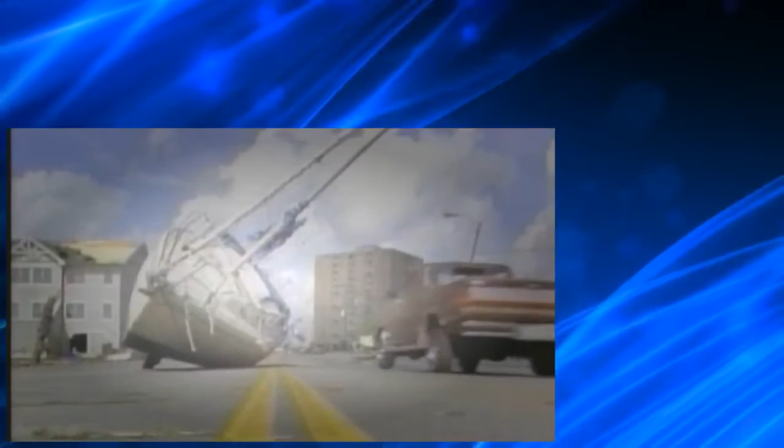These men are building the longest bridge of its type ever attempted in North America, but they're doing it in the worst possible place. In Charleston, South Carolina, where hurricanes, earthquakes, and the world's biggest container ships pose a deadly triple threat to the bridge and to the workmen building it.

If they succeed, Charleston will manage to remain one of the nation's most vital ports. I plan for this bridge to last forever. But if they fail, this flower of the South may fade into history once and for all.

6:30 a.m. in Charleston, South Carolina. A steamy Monday in June. Near the mouth of the Cooper River, a crew boat eases from its dock and heads out into Charleston Harbor. Morning. On board, 20 bridge builders, headed to work on the construction site of the new Ravenel Bridge, a long overdue replacement for a pair of decrepit steel spans.

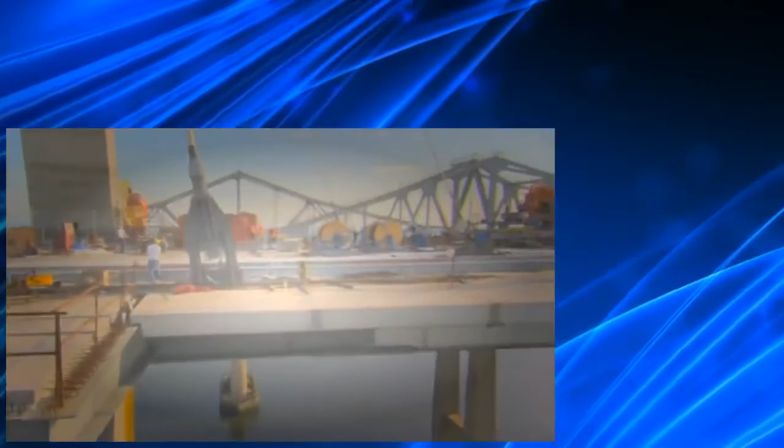Cable stay structures are the hottest thing in modern bridge construction, and engineers around the world are trying to outdo each other with even more daring designs. On a cable stay bridge, the deck hangs from steel tethers anchored high up on the main towers. They're known for their sleek lines and simple beauty, but they're notoriously tough to build. The longer the span, the longer the cables, and the bigger the challenge to builders. When completed, the Ravenel Bridge will be the longest cable stay bridge in the U.S.

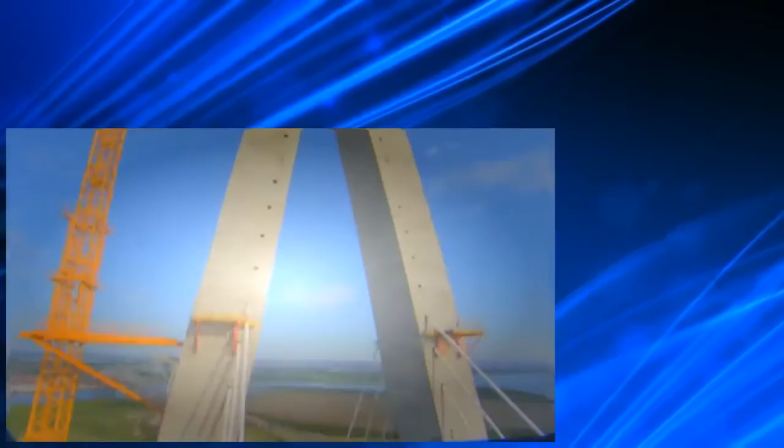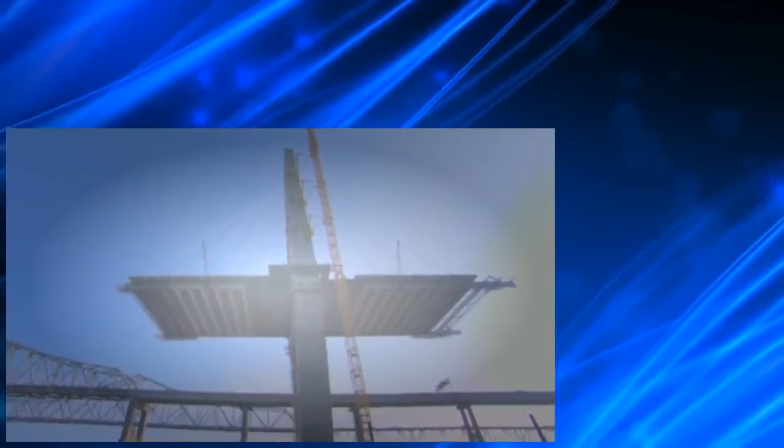Since 2002, this crew has erected two 550-foot concrete towers, built two interchanges, and nearly completed both elevated approaches. Now, they're hanging the bridge's 64 road deck sections. Thousands of tons of steel and concrete dangling 200 feet over the Cooper River. To stay on schedule, these guys need to assemble a new deck section every 5 days. That means hanging girders and floor beams, picking and placing concrete slabs, pouring connective concrete, and stringing and tensioning cables.

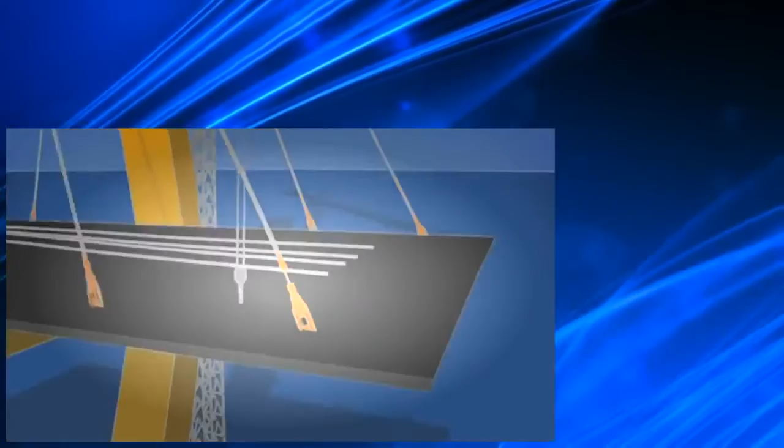And while this boatload of guys does what it needs to do here on the West Tower, another bunch of guys is doing the same work over there on the East Tower. The objective? To meet in the middle and call it a bridge. For most of these men, this is the biggest job they'll ever take on. It's also the most hazardous.

These workers spend 12 hours or more per day stranded on this narrow island in the sky. They depend on each other for their lives, now more than ever. Just a few weeks before, a steel worker plunged to his death after failing to attach his safety harness. So these days, Superintendent Everett Gibbs drills into the heads of his men the danger lurking everywhere.

Today, we're going to hit a couple quick topics on our basic safety rules that we seem to be having a problem with. The first is safety glasses. You lose an eye. When you lose it, you lose it. Everybody on the same page? Since the fatality, failure to tie off carries serious consequences. If you are not tied off, you are fired. Period. You have kids, wives. Don't let this be your last job. How's that for motivational speaking?

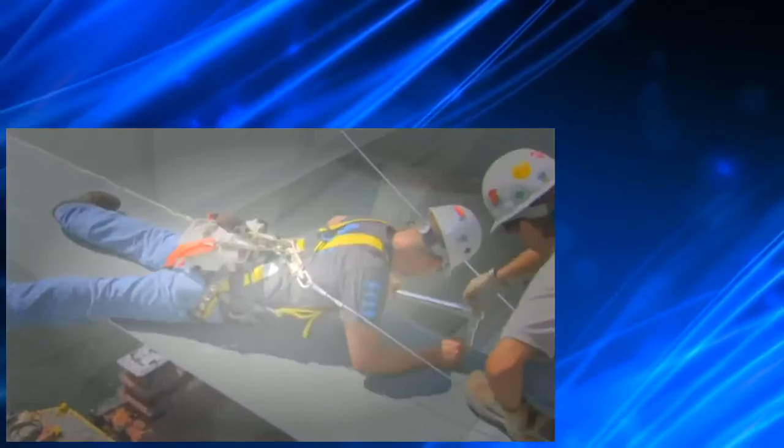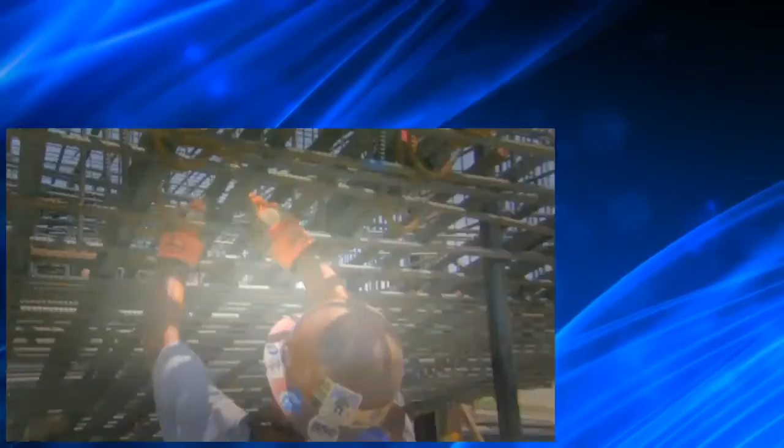Day 1. The crew is getting ready to hang another segment. 50 feet of brand new real estate. Now's when we get creative, because we're going to run into this every time from here out. They've done it several times already, but they've never had to do it under so much pressure. The first deck sections were part of a learning process and took weeks to complete. But those days are over. Let's go! Come on! They have 44 segments to go, and now they've got to shift into high gear.

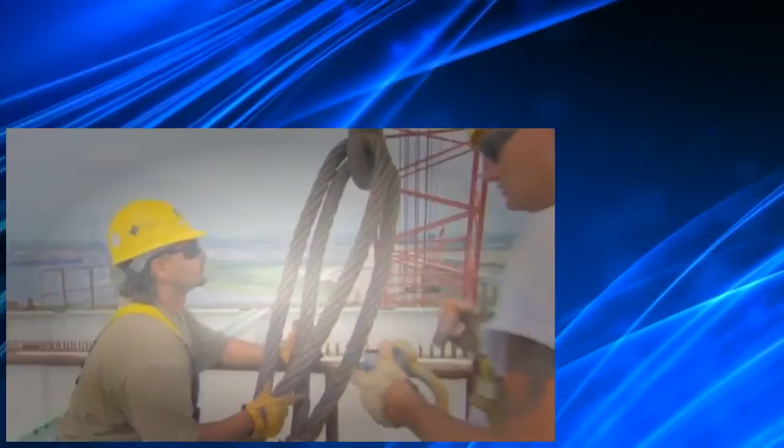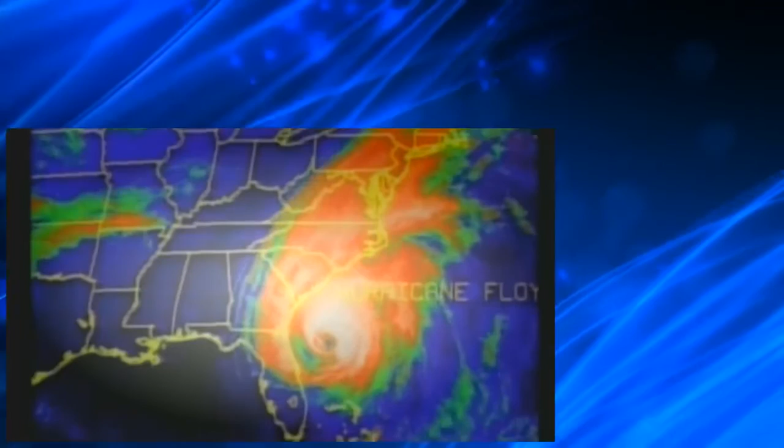Because Charleston sits smack in the middle of Hurricane Alley, and the crew finds themselves smack in the middle of hurricane season. Most everyone on this job site remembers the destruction Hurricane Hugo brought to Charleston back in 1989. 10 years later, it was Floyd that did the drubbing. And now, just as deck construction is underway, forecasters say the East Coast is overdue for a major hurricane.

To bridge workers like Dave Vanna, every foot of deck they hang and every day that passes without a storm feels less like luck and more like the run-up to a terrible reckoning. If you look over at that tower, before these are connected, there's this big massive roadway just hanging there in the air. Until we're connected and everything's locked together on the shores, it's a very big, vulnerable piece of weight sticking up there. And it's getting bigger by the day.

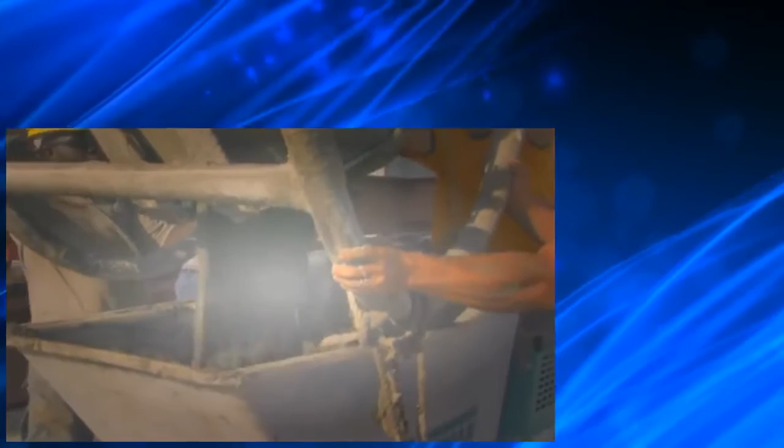Now, as the next construction cycle gets underway, the men are taking care of some unfinished business. A concrete pour has been scheduled to put the finishing touches on the road segment they completed the week before. Incoming! All right, let's see some action here. This weighs 17,000 pounds. The name of the game? Get 85 tons of concrete into the gap between the deck panels.

That's a Georgia buggy, they call it. Why? I'm not sure. I'm from Maine, and Georgia's down south. You're gonna have to ask one of these southern birds that.

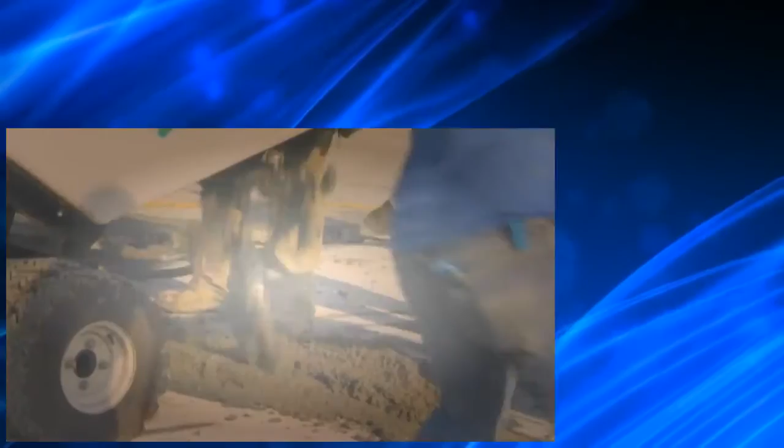They've got to get the mud in the hole, as the guys say. It's a touchy mix. You've got 3 hours supposedly from the time it's dispatched to the time it's delivered. It means it's got to leave the plant, go to the dock, offload it on the barge to here to us. And it's got to settle to the bottom, which takes a lot of coaxing.

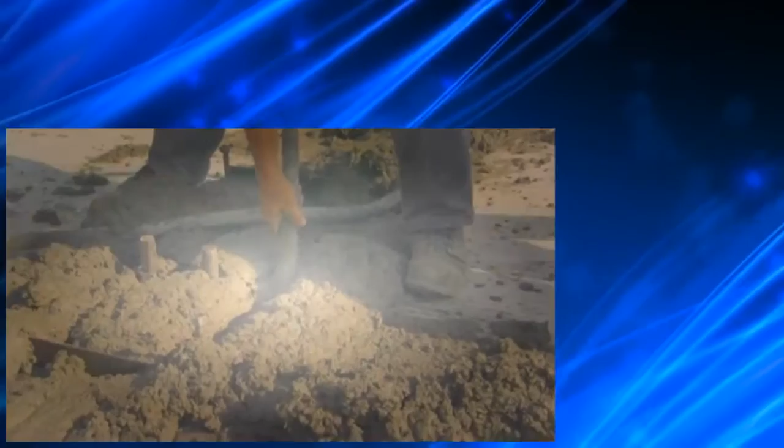Well, that concrete's still good. You get it in there and get the vibrator to put it in, and if it'll level out, it's all right. The vibrator makes sure the mud settles, until finally they can flatten it out, smooth as a baby's butt.

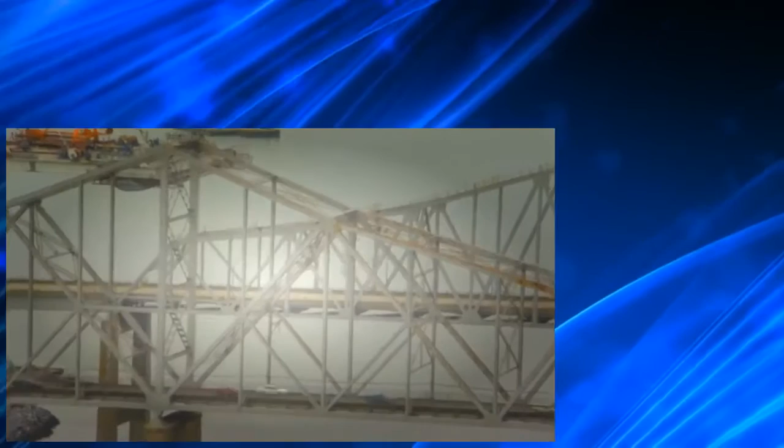Once upon a time, these antique spans were sufficient to carry Charleston's 65,000 cars each day, but not anymore. We knew that the old bridges had to be replaced because they were getting very, very old. Structurally, the old bridges were a 4 out of a possible 100. Simply put, the old bridges are accidents waiting to happen. Not only that, but today's biggest container ships simply can't fit beneath them.

Chris Thornton has been piloting ships like this under the old bridges for 15 years. At low tide, these babies just barely squeak by. The bridge when I first started wasn't an issue, but now it seems to me that every ship has an issue with it. We have to monitor the current and the stage of the tide to get under the bridge. If Charleston can't accommodate bigger ships, it could become a second-rate port.

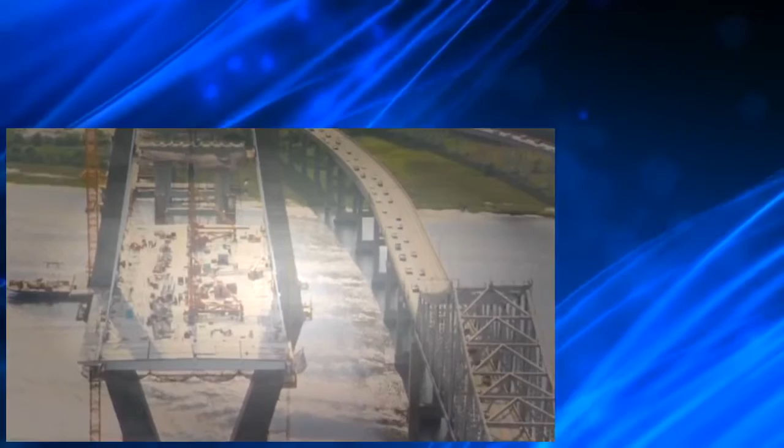But squeezing the $600 million for a new bridge out of state and federal coffers would take a special kind of person. Someone with vision and, more importantly, clout. It took State Senator Arthur Ravenel, a man with a lifetime of political favors just waiting to be cashed in. You go to people and you ask them for big bucks, they're a little bit reluctant to open their wallets. But everybody came around, and the bridge is being built. The state decided to name the bridge after him, while he's still around to enjoy the honor.

Today's work on last week's deck section isn't done until the quality control or QC guys say it is. James, Dave, and Mickey are the first line of defense in making sure the bridge will last its promised 100 years or even longer. 10-4, me and Todd are on the west right now. The existing bridges aren't anywhere near that old, but both are already obsolete. If this bridge is going to last forever, there can be no shortcuts.

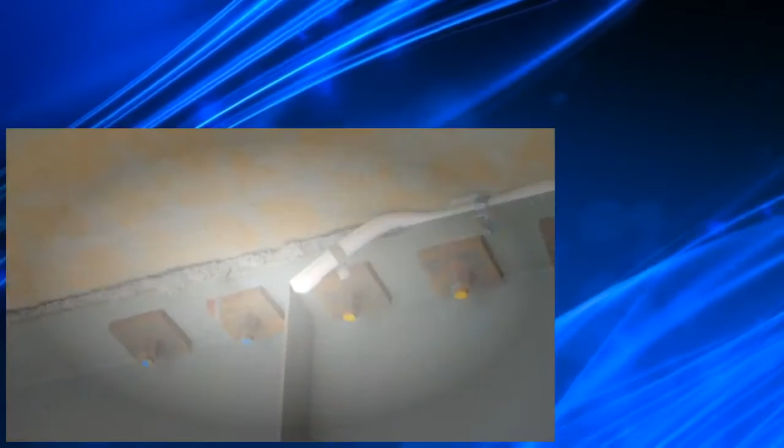We got painters coming here around August, September, I believe, and it's got to be clean. You have to have a clean surface for the paint to stick to. They're snooping around under the deck, and they found a problem. Anywhere there is drippage of concrete under here, we can't have it. Concrete has been seeping through the cracks, and now it's starting to harden. This might be the worst.

Mickey and I took a look underneath segment 205 after they poured that infill pour, and there are several areas where they had leakage. It's just a problem of access down there right now. There isn't a good place to tie off and get workers down there as the concrete pour is going on, to get the concrete off when it's still wet, which would be the easy thing to do, of course. Pressure washing. Right. But access right now is a problem, so... Right. Well, they're going to have to make access to get it done. Yeah. That's just all it is to it.

So if we get that done, and from here on out, if they pressure wash right when it's poured or within 6 to 8 hours after it's poured, it can be removed. But if they chip it off, it could affect the paint, it could affect the girder, and so on. I'm going to bring this back to the office, discuss it with Marvin, and then see how he wants to handle it. Okay. I know there's priorities, but this is a priority also.

Nice catch, guys. They've got the safety of the longest bridge of its type in the Americas riding on their shoulders. With pressure like that, they need to kick it out now and then.

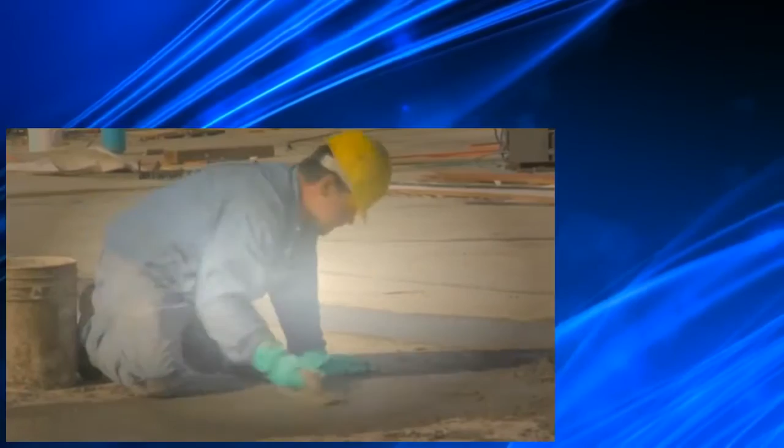Day 2. The crew has burned an entire day of a 5-day schedule finishing last week's deck section. To meet their deadline now, they'll have to do in 4 days what is usually a stretch to get done in 5. They're ready to attack the steel for this week's deck section.

Massive floor beams that are just arriving by truck, about a mile upriver at a former Navy yard, now a staging area. Each of these floor beams is 126 feet long and weighs 25 tons. It'll take 2 precisely coordinated cranes to get each one of these puppies onto the waiting barge.

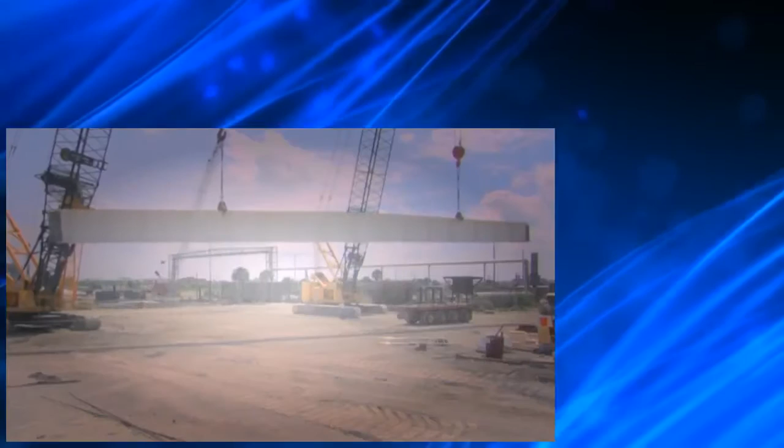Each truck deftly positions its load, and then the ballet begins. A dance between man, machine, and monster chunks of steel. It takes half a day to get all 300 tons loaded up.

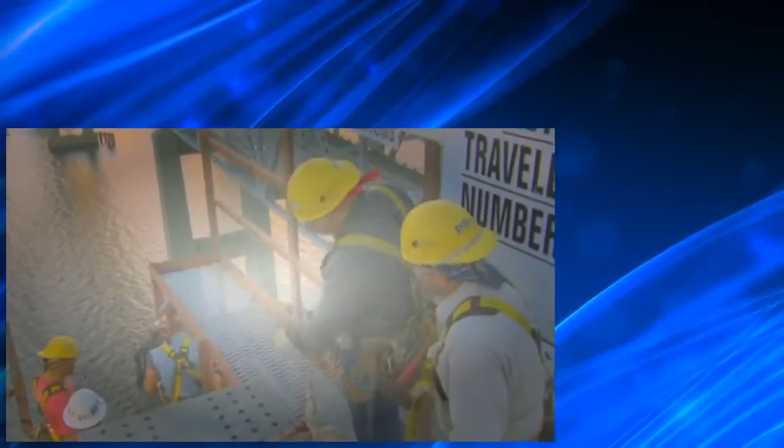Now all they need is a tug to get them down the river to a crew of anxious and bored ironworkers. They wait and wait and wait a little more. But by the time the steel arrives at the bridge, it's already nearly 8 p.m. The question is, should they call it a day or press ahead? Their schedule is slipping, and the bridge needs this iron.

Good thing these ironworkers are a special breed. This is not a crew that puts off till tomorrow what they can get done now by working all night long. Cabling on up. There's nothing newfangled or high-tech about their job. Give me a little bit of left-hand swing. Just 10 men, a crane, and a radio.

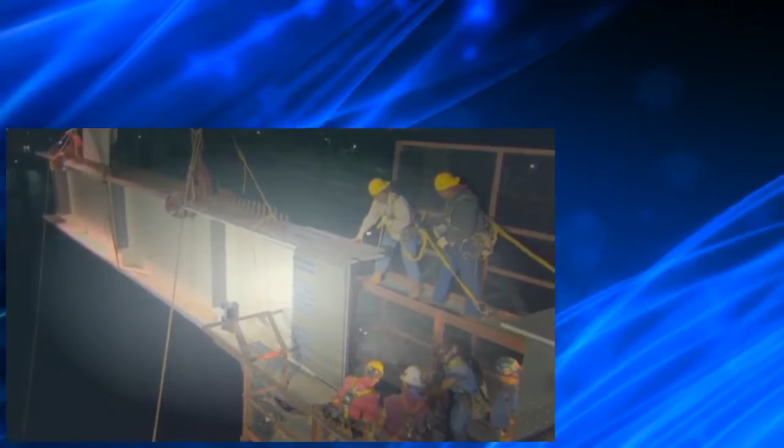Boom down. Maybe a little bit of cable up. To get a couple of 40-ton pieces of steel to fit like a glove. Hold that. Bring it right. Once the girders are in place, workers slam steel pins through bolt holes.

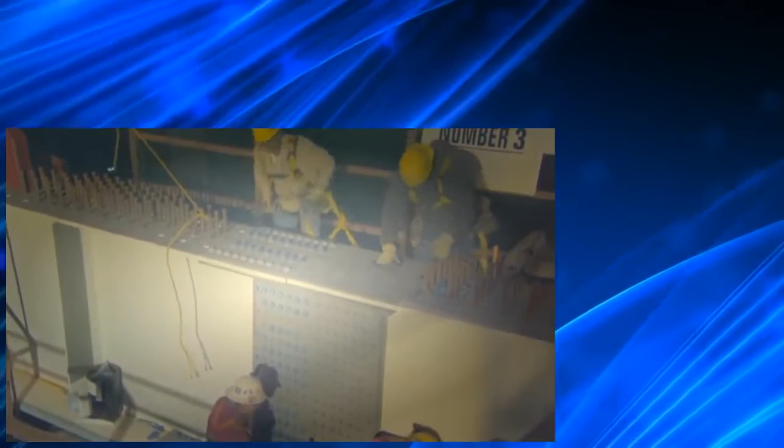Only then do they get the pleasure of cranking home all 494 bolts. Every bolt and nut that goes into the bridge is hand-picked and matched by type, size, and load-bearing capability. And Lance here is the brains behind all the bridge's nuts. In the main span of the bridge, there are 172,000 bolts. 61.2 tons of nothing but nuts, bolts, and washers.

How many of those things you put together in a day? If I'm going to be on television, 1,200. If you or my boss is not here, 800. You getting carpal tunnel syndrome? You using those fancy words, you got one for bored? How do you cope with the boredom? I'm not really here. Just last week I was deep sea fishing and Paris Hilton was the first mate on the boat. Good one, Lance.

Does it matter how the nuts go on? Yeah, nut goes on the threaded end. Washer goes between the nut and the head.

You feel a little neglected out here? Sure, I'm not very sociable. In fact, talking to you is about the most mouth running I've done in a long time, and I'm getting kind of tired of that.

Day 3. Daylight reveals that the night shift pulled it off. The steel is up and ready to receive the panels. Thanks to the ironworkers' determination, the crew seems to have reclaimed a good chunk of their schedule. But there's still one more job to do before they can lay the concrete deck panels. The cables need to be strung and tensioned.

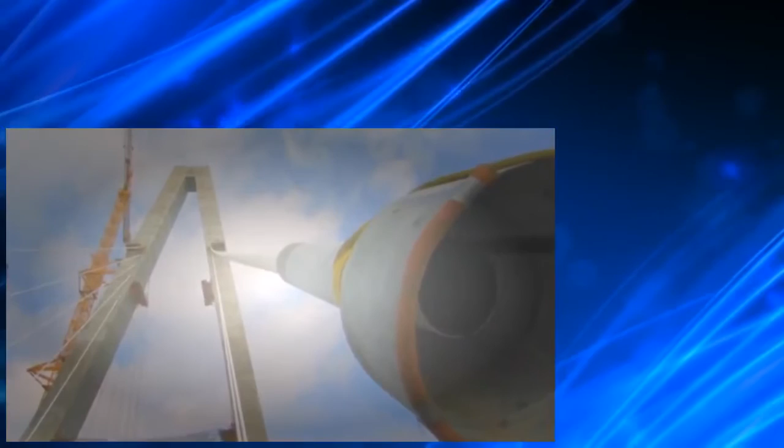And it can't get done until this guy, Bridge Inspector Russ Touchberry, is there to oversee it. Russ is one of the lucky guys charged with making sure mess-ups don't get overlooked. And if there's one bridge element everyone wants to be sure is perfect, it's the cables. A lot of people actually wonder if the cables are simply there for looks. No, that's definitely not the case. The cables hold up the road deck, period. And they're a lot more complicated than they look.

To string the cable, a crane attaches the long white tube that gives the cable the appearance of being a single strand. But it's just a protective sheathing through which the actual cable strands are fed. Up to 100 plastic-wrapped strands can be in one white tube. And each strand consists of 7 individual wires sealed with a coating of wax.

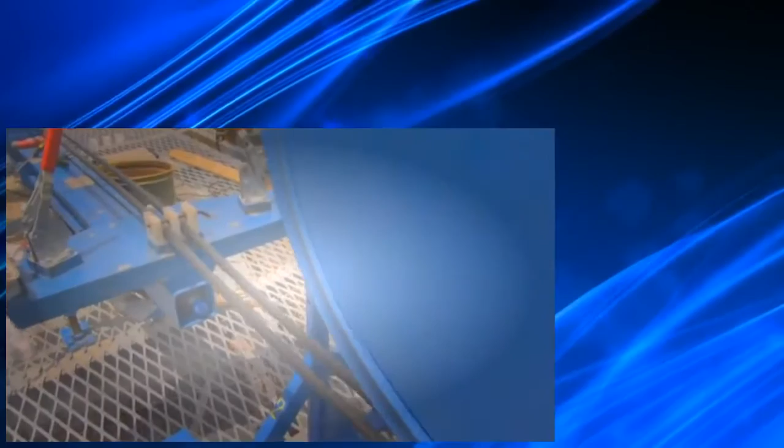When it's finished, the bridge will have more than 5,000 miles of individual wires in its 128 cables. End to end, that much wire would reach to the West Coast and back. The strands are pulled up through the sheathing 2 at a time using a motorized shuttle. Russ's job is to make sure they end up where they belong, problem-free.

If we have a case where there's actual strand exposed, then that needs to be fixed by that repair procedure. So that's what we're looking for. Once strands are inspected, they have to be tightened 200 feet up inside the towers. Luckily, there's an elevator and Dave Vanna to operate it.

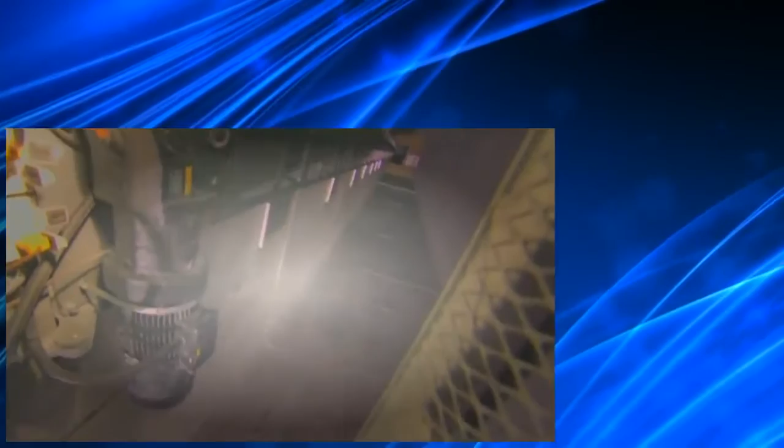What happened? Well, we're in the middle of a small minor crisis here. Yeah, the power, it shut off on itself. I'm coasting down on the brakes, Brian. Yeah, as we're going to the top, as you know, we're holding the camera. Our umbilical cord that runs this elevator up actually got snagged down below on something, tangled up, and it actually pulled out of the power supply.

Right now we've got approximately 200 feet to go before we can get off, and we're working on fixing it. That smell is the actual brakes. That's the brake pad, and you can smell them getting warm, so. But then when they overheat, we get a quick ride at the bottom. Yeah, if that's true.

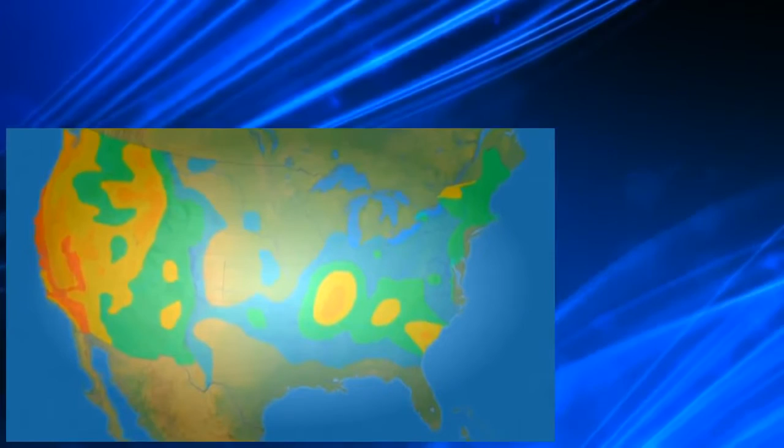But having the TV camera guy in there with me coasting down, I guess they're going to get a show of what we have to go through. Hopefully, they won't suffer anything worse than a broken elevator. But in Charleston, anything is possible. What most people don't know is that the city sits directly on top of the most seismically active fault line in the eastern U.S. The last major quake, measuring 7.0 on the Richter scale, devastated downtown Charleston and killed 60 people. That was in 1886.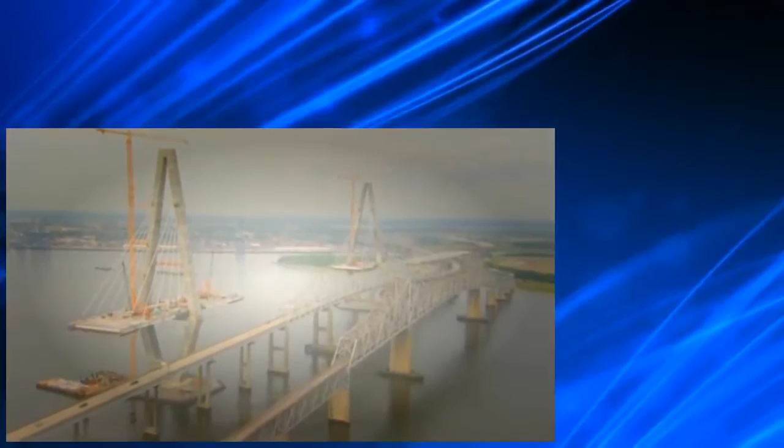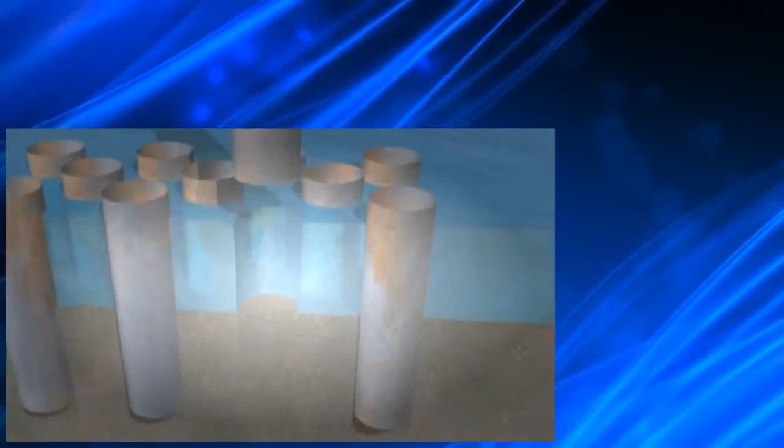Today, seismologists predict that another killer quake will almost certainly rock the bridge sometime in the coming century. Bridge designers say, bring it on. They've engineered this baby not only to withstand the next big one, but to last 100 years, at least. They began by making the towers rock solid. Because of the tremendous load the bridge would bear during an earthquake, the footings had to be deep, real deep. For each tower, 11 steel cylinders, each 10 feet in diameter, were sunk nearly 100 feet into the dense clay at the bottom of the river.

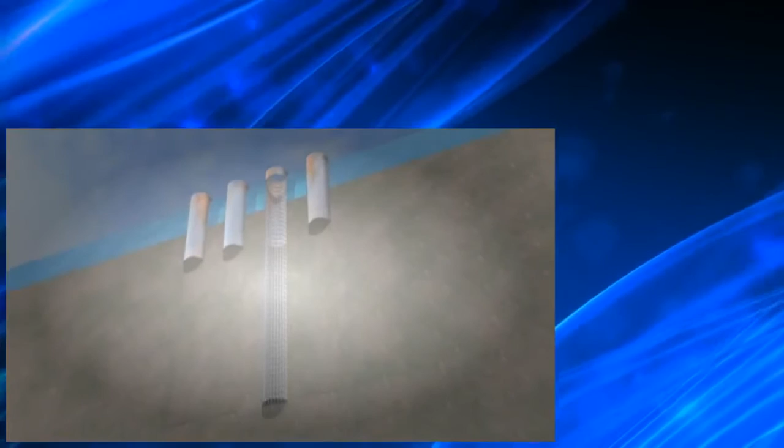The shafts were dug even deeper, to a depth of 230 feet, with mammoth rebar cages inside the steel casings, encased in nearly 1,500 tons of concrete. The result? Footing strong enough to support the towers in a major earthquake, but not strong enough to withstand a direct hit from a container ship. That's no Chicken Little scenario. It's happened before. In 1946, a runaway ship took out a main span, spilling a family of 4 in their car into the Cooper River. In the last 25 years, ships have twice run aground to avoid colliding with the bridge.

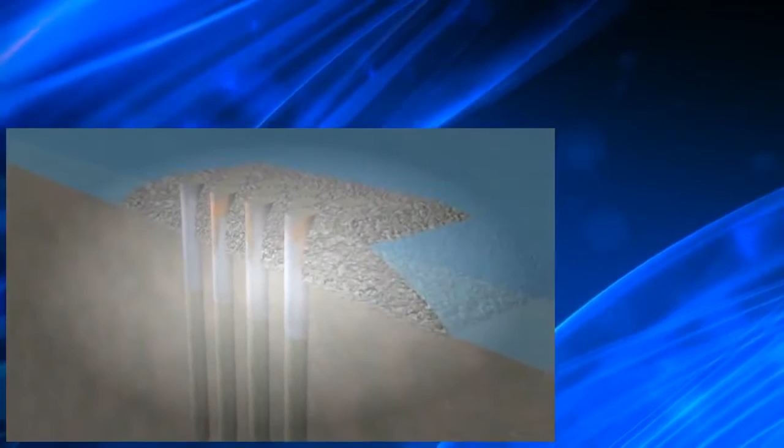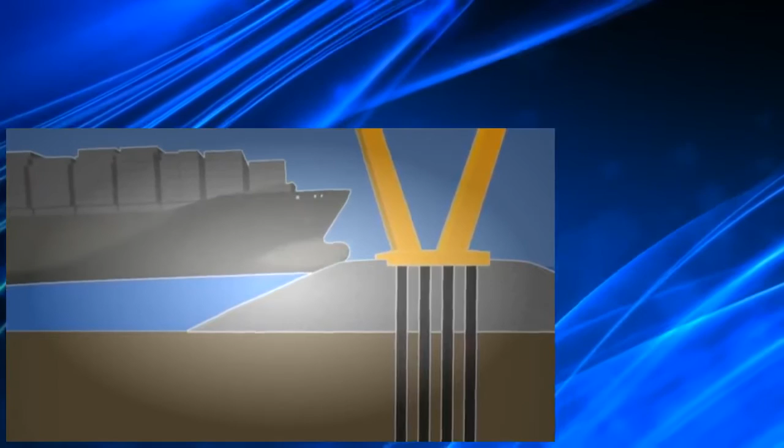So this time, designers decided to do something about it. They surrounded the towers with protective rock islands crafted from 17 shiploads of Canadian granite. 700,000 tons of the stuff. Enough rock to create 5 acres of stone on the riverbed and an acre at the surface. It's hard to appreciate the rock islands because you really don't see them. All you see is just the top. It's almost like the island of Hawaii. You just see the tops of the old volcanoes. With a base 5 times larger than the top, the islands slope up from the bottom of the harbor to stand as impenetrable shields between a runaway ship and the bridge. It looks like the future Ravenel Bridge will be wholly protected against man and nature.

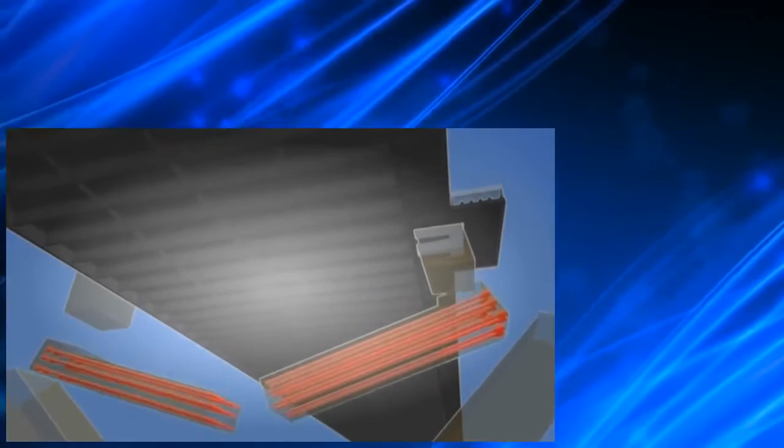But there was one more engineering challenge. Because the bridge is diamond-shaped, it needed a little help around the midsection. Hidden inside the crossbeams are steel cables that run from one side of the tower to the other and actually hold the whole shebang together. If, for some unbelievable reason, they all broke at once, the actual bridge would collapse. It would be catastrophic. That's where Dave comes in. He's making sure that these vital tendons are protected from the #1 enemy of steel, rust.

Dave's the superintendent on the other tower, but today he's here on his day off. How about you, Brian? One of my nicknames out here is Super Dave. I'm not sure how I got that, but that one stuck a few times. Elevator's broke down.

Sometimes Dave feels a little out of place. Not because he's on the wrong side of the bridge, but because he's on the wrong side of the Mason-Dixon line. I'm from a small country town in Maine called North Nobleboro, Maine. For the most part, I've had some good southern hospitality. I've run into a couple folks that had some prejudice against Yankees, but that's okay. I try to instill that we're all Americans.

Dave's also the bridge's leading expert on something called grout, a unique sealant that protects structural steel and cables from rust. The crew mixes up their own special batch right on site by combining cement powder with water. Then it's pumped into nooks and crannies that regular concrete can't reach. That's holding 75. Let me pinch it off, see how far it goes up.

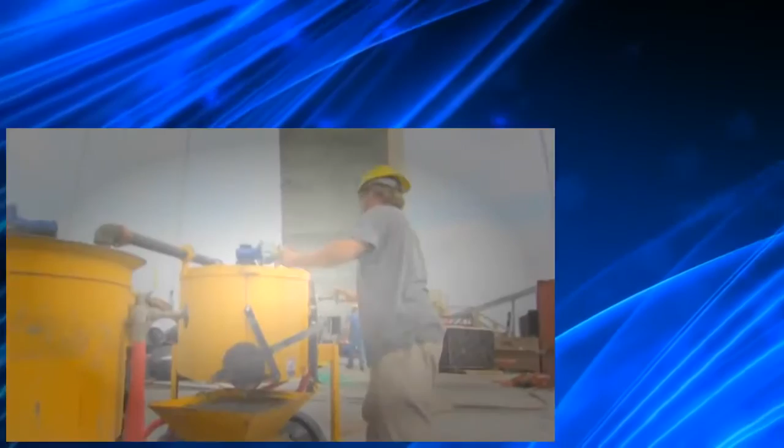In fact, when it comes to grout, Dave's a bit of a nerd. It's like a real expensive coat of paint on a Rolls Royce. It's what will keep this bridge together for 100 years. So if we don't get this perfect, then we're in trouble. Are you seeing any grout yet?

While the guys work on the grout topside, Dave heads underneath the main span at the crossbeam, where the end of the tendons are locked in place. There's 4 million pounds of force right on this one tendon. It'll keep them from corroding and ultimately keep the road deck out of the Cooper River. We're going to see some action here in a minute.

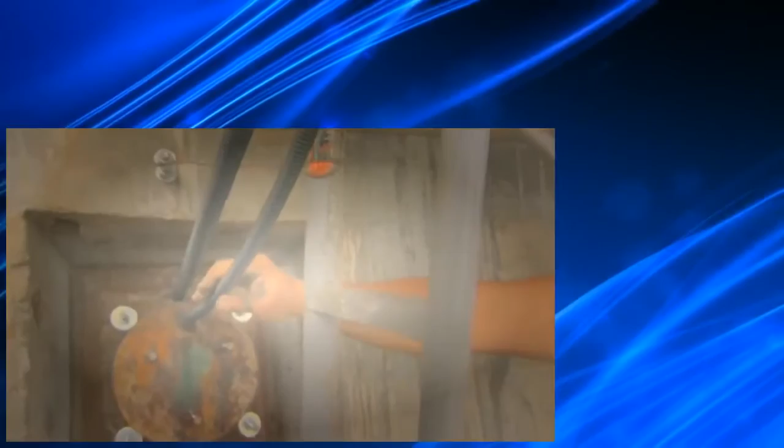All right. Hold it right down a little bit, Russ. All right, Grip, you bleed your cap out one more time. I've got grout here. Okay, do you count down for the shut-off? Okay, pump shut off in 3. 1, 2, 3. Pump is off.

If we had any type of air bubbles in these lines, I just need to make sure this stays above that, and that'll just assure me that whatever grout's left in these tubes will keep that cap full.

Am I getting heavy, Russ? Nah, man. All right. It's a beautiful thing. A crew boss and a whip-cracking bridge inspector pitching in together. Freezing cold right now. Russ Touchberry better enjoy this moment while he can.

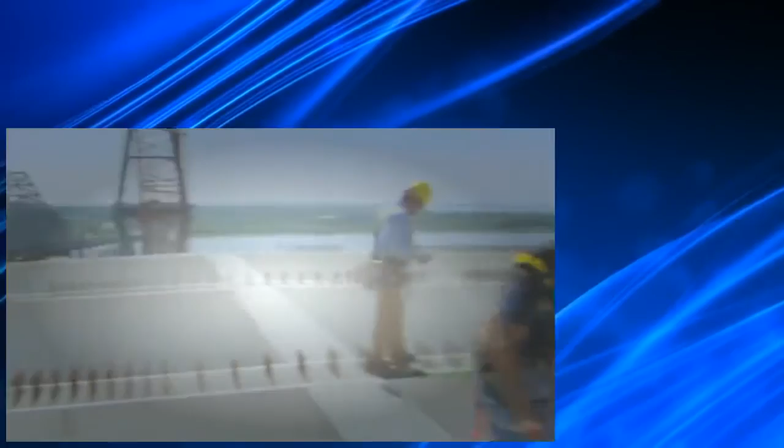Day 4. The steel framework is up, the elevator's fixed, and the cables are tensioned, ready to hold up the 200 tons of new concrete destined for this week's road deck section. Incredibly, the men have fought their way back on track. I need a 10 right there. I don't need to pile up on that. But the delays of the previous 3 days have deck foreman Alan Griffin moving at warp speed.

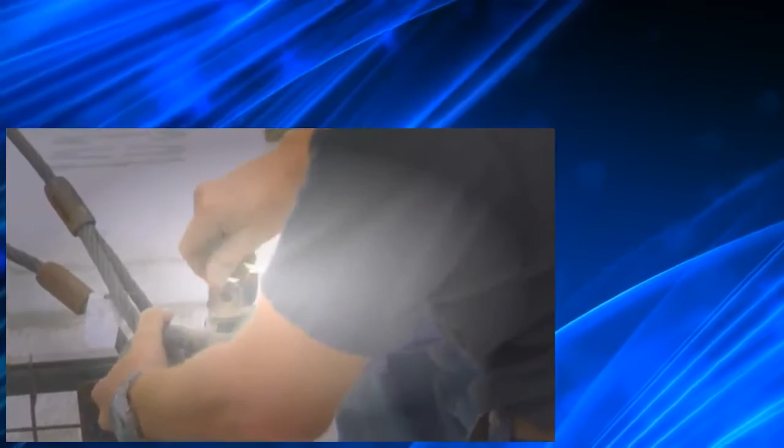This guy is busy. I got 16 things going on at the same time here. Just put the shackle through right here, and we'll put the chains up on the hooks. Creative engineering. He doesn't much care for the limelight. I'm running around with a microphone on me. So good. Don't even ask. But he can't hide from us.

Easy on the phone. Alan keeps tabs on just about every job on the deck, no matter how small. Oh, yeah, I'll get it. We'll need to go around the hook. We'll need the big blue. Just leave those on the hook, because that's going to be ours permanently. I don't know whose they are or whose they were, but they're mine now. Let's go ahead and swing to your right. Go ahead and boom in. Boom it down.

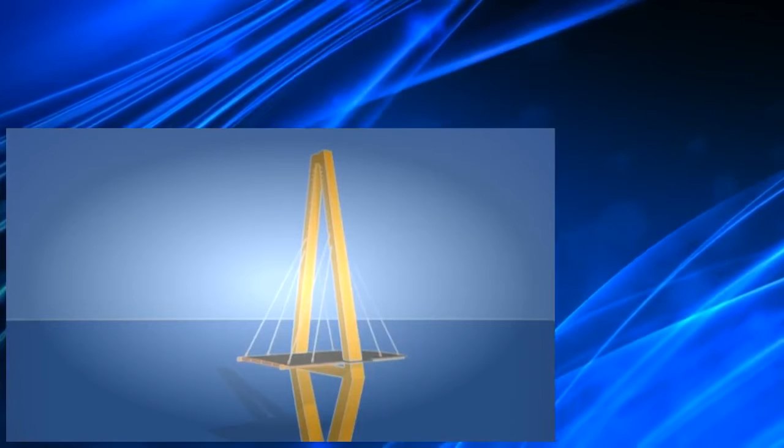Alan's a micromanager. He has to be. There can be no slowdown or deviation from the tight confines of the construction sequence. Easiest way to describe this would be a seesaw. If you're sitting and you have 2 equal weights on both sides, that seesaw is going to be balanced. Both people are going to be up on both sides. The weight load on the bridge must be carefully balanced at all times. If they build too many sections on one side, the tower could topple.

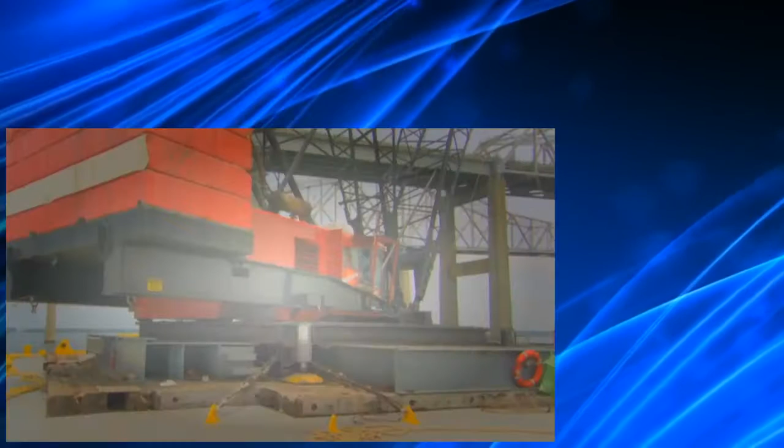Right now, Alan is running into problems. To get the steel and concrete they need onto the deck, Alan relies on the ringer crane, a 400-ton rotating behemoth mounted on a ring of steel. Because the crane rides on a barge, it can be moved around the job site to tackle just about any task. It's the bridge builder's most versatile tool.

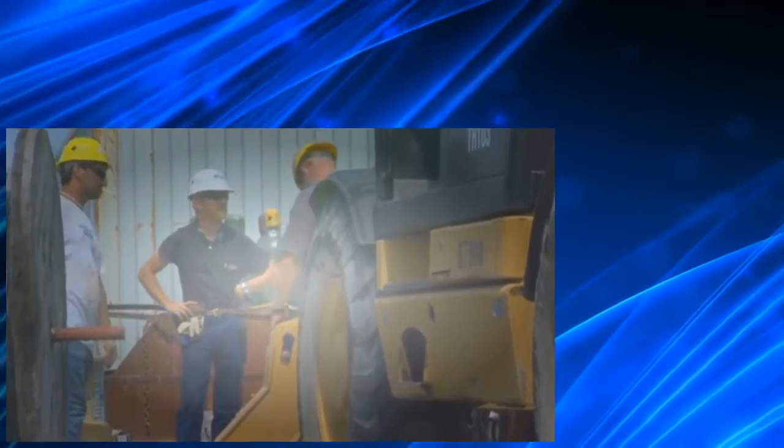But there's just one of them, and right now it's parked on the wrong side of the tower. And there's no tugboat available to move it. Ringer can't reach it. Can the forklift hook the darn thing? Either that or I got a ringer hanging in the channel doing nothing, costing $1,000 an hour. See what we can do about getting any of those slabs up there.

It takes 5 hours, but by 1 o'clock the crew finally gets their tug, and the work can begin. They've got a mere 3 hours to lay this section's 12 panels. After that, they lose the ringer crane again to the crew on the other tower. At 200 feet with only a safety cord to catch them, it is extremely dangerous work.

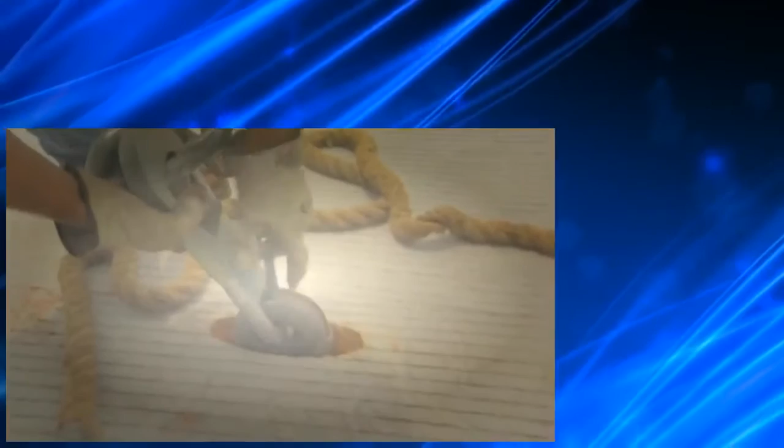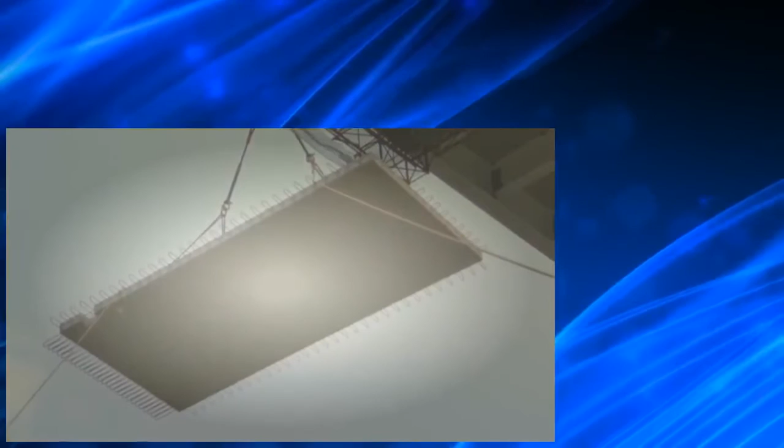Time is critical, but they can't sacrifice quality. To get the job done, the crew must rely on the crane and its operator. And that pushes them both to the absolute limit of their abilities.

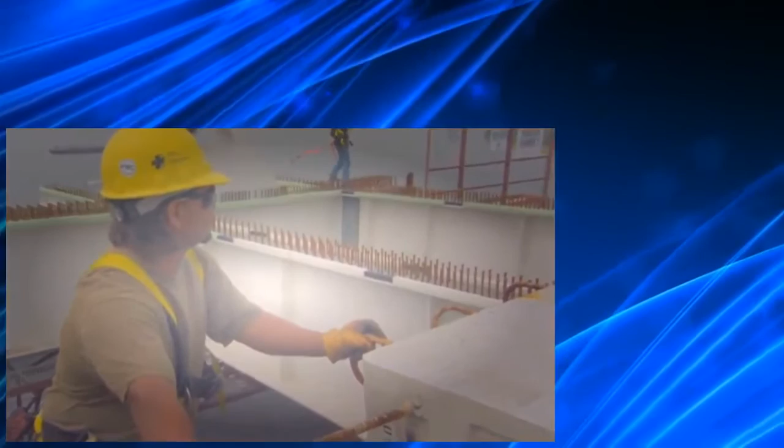What we're looking for as we're setting this, we want to cover at least 2 inches of concrete over the lip of the steel. I need to have that on all 4 sides. Now, sometimes we have a little bit of variation in that slab. So what we try and do with that is, if there's, say, a 1/2 inch of variation, is split that difference where I have a 1/4 inch off each side, whether it be north, south, east, or west.

To get it as absolutely square as we can, where we can have as much weight as we can on the steel itself. This stick right here has 280 feet in it, and he can move that thing within 1/8 of an inch of tolerance of what we need. They have that much control down there in that friction rig.

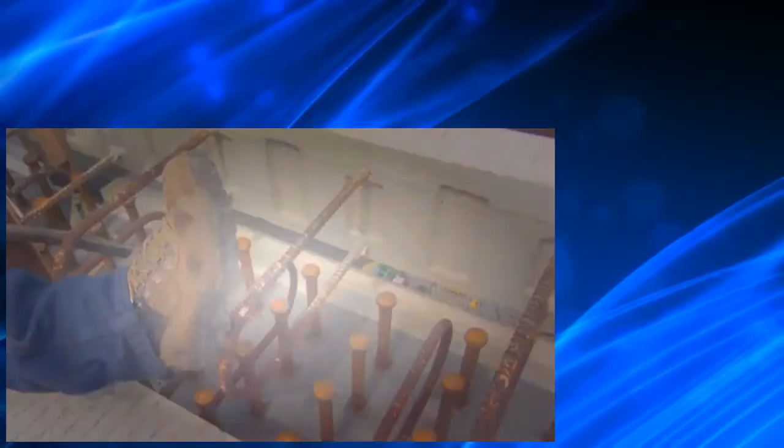Alan, the chief rigger, and the crane operator stay in constant radio contact. The trio must make thousands of minute adjustments to guarantee that the 16-ton slab sits squarely on the beams. You need to go this way, just there. They must get it to within a fraction of an inch. He's good on that corner, you're good on that corner. It's got to be about right. Take it down. Drop it down.

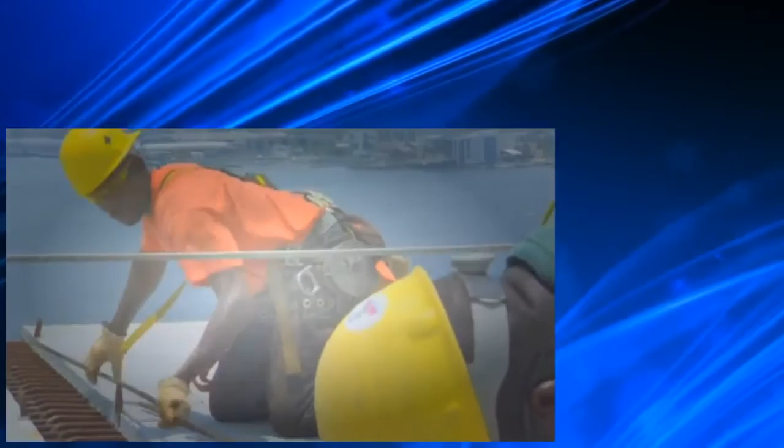With the panels laid, they waste no time knitting them together with rebar. After the concrete is in, the deck will be transformed into one giant slab. But as always, before anything can go forward, the last phase of construction must be inspected. This afternoon, panel inspection falls to Russ Touchberry. Don't let this boy's baby face fool you. He may be only 25 years old, one of the youngest on the crew, but he's got an awesome responsibility.

Couple things I noticed up on the deck. The sidewalk slab where the hurricane tie-down is supposed to go through, it's supposed to be sidewalk slab 10510. They put 20515 in its place, and it doesn't have a block-out hole for the hurricane tie-down up top. I wonder why they did that. It's his job to hold the bridge supervisor's feet to the fire, looking for construction errors and then standing his ground to make sure they get fixed, no matter what the cost in money or time.

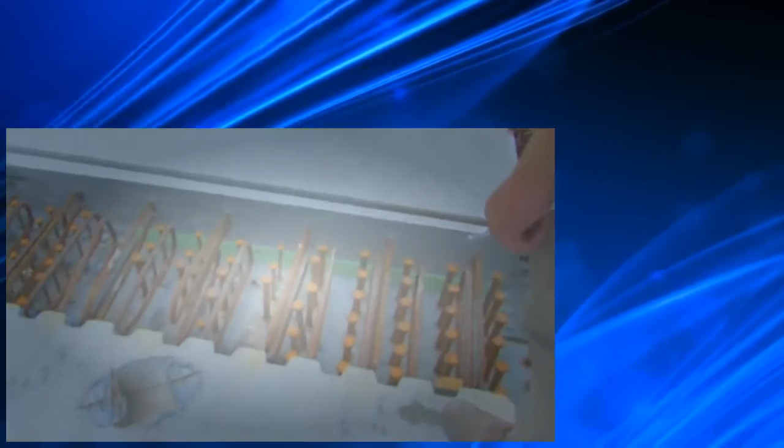This slab may look like all the others, but it's not. It's the wrong piece. But that's not the worst of it. In the process of trying to shoehorn it into place, one of the guys pulled a big no-no. Another thing it looks like they did up here is they heat bent some of the rebar so it didn't conflict with some of the tie-down stuff that goes in the top flange of the edge girder.

Russ has discovered a major error, and Pete Gibbs, the main span superintendent of construction, wastes no time to arrive on the scene. Now on the other side, you got one on the inside like this, so we need to find out what the number is on that slab down there, check it with what goes here. This one's going to have to be taken out, the other one's going to have to be put in this place. It's supposed to be 10510. The panel that's supposed to go here is 10510. Pete is pissed. He'd probably like to shoot the messenger.

But the chief rigger, Eastwood, steps up to the plate and takes the blame. We were under the assumption that this was a typical panel, and apparently it's not. There's a corresponding hurricane restraint hole, as you can see in the corner of the slabs, and it wasn't in that one. The panel on the barge is unfortunately not stenciled, so no one knew the correct number. And now we put two and two together. We know where the panel is, so we take this one down and put the correct panel where it goes. But Pete has bigger headaches than replacing the edge panel.

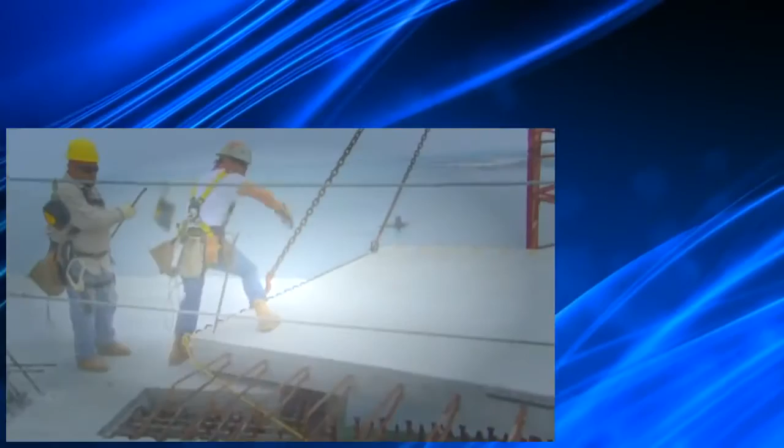At $1,000 an hour, the ringer crane is called back to fix a problem that should have been avoided. With a project of this scale, hiccups like this are a fact of life. We take steps back every day, but fortunately we've got enough people out here that's been in the field for quite a while, and we managed to keep moving forward.

Having to be the bearer of bad news up on the bridge, it's not surprising that Russ likes to hightail it out of town whenever he can. And in the South Carolina low country, there's nothing more stress relieving than going shrimping. My pop always said work hard, play hard, and a lot of hard work on the bridge, a lot of work all week long. And if you get a chance to walk down the creek with a 40-foot seine net for a couple hundred yards, it'll help you relax a little bit.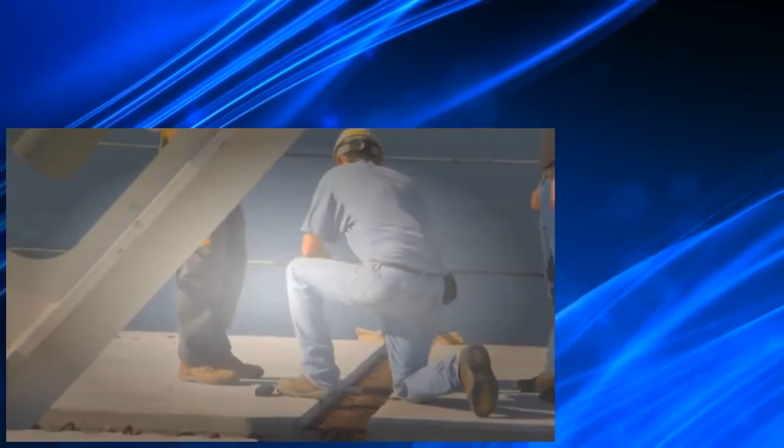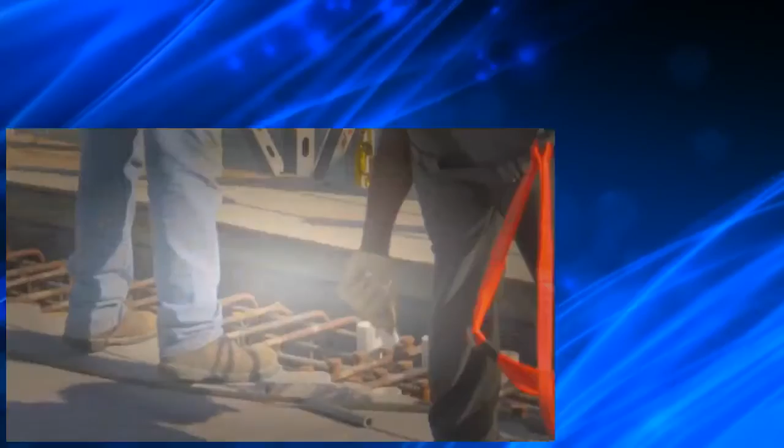Day 5. With the panel problem solved, the task of the day is to pour concrete into the gaps between the panels. Though it may not look like much, the infill makes up an entire quarter of the road surface. It ties the loosely placed panels into one monolithic road deck. But the crew is far from ready. They don't have enough water on hand to keep the concrete moist. And the rebar isn't set either.

I got to hold them all down while we pour. Till we get it poured, whatever it takes. Okay, now I need you to jump back over the other side real quick. All right? Stop what you're doing right now. Stop this. Over on the other side. Need you over there now. On that edge form. Now.

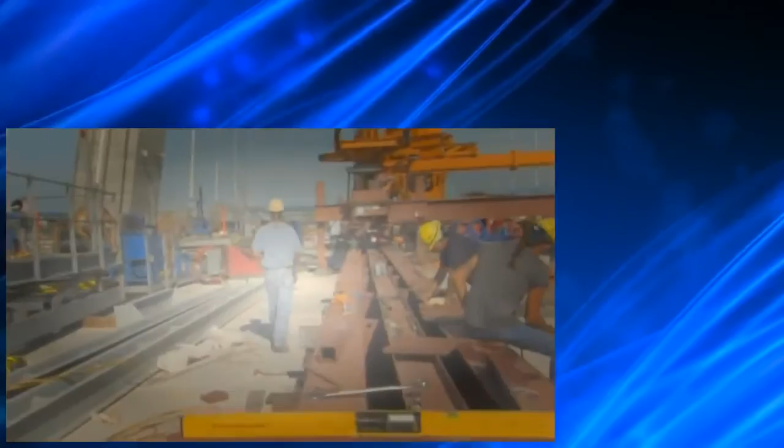Water down on that barge. We gonna be able to get them in a pan or get them on the damn elevator? I got a mud bucket on the hook right now. No, you can't steal no guys from up here. No guys. I'm undermanned already.

Huh, pick up the damn pace. The hell's working hard and you're just LL Cool J over here.

One, ease up, on down. Good, touch down, hold that.

Once the concrete gets here, how much time do you guys have to get it poured, typically? Typically about 2 hours. That's from the time that it gets batched at the plant and it gets dropped off at the hill onto a barge and gets shipped out here. That includes all that time. And this stuff is a special mix, it's an 8,000 PSI, and it kicks off real rapid, turns into brick. And if I don't get it in the hole real fast, it'll harden right up on it, and it makes it a lot harder work.

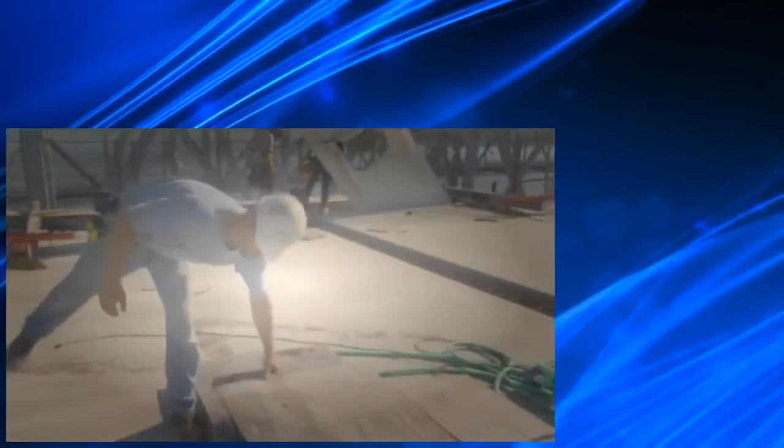So how are things looking for today? I don't know. I'll let you know when the first bucket comes up. Right now, it's been pretty hairy scary, trying to get this prepared for it. When the concrete arrives, it'll be a frantic push to get it poured into the gaps just before the concrete becomes as hard to handle as a truckload of super glue. Come on, come on, come on!

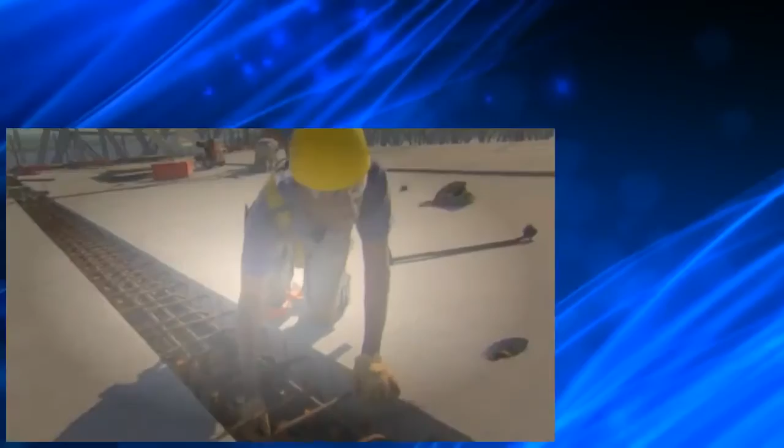Well, guess what, Bubby? It is coming. It is here. Good. All right, Chris, we're going to bring it in onto the south side of the east derrick here. There's a little runway between state pipes we're going to try for this shot.

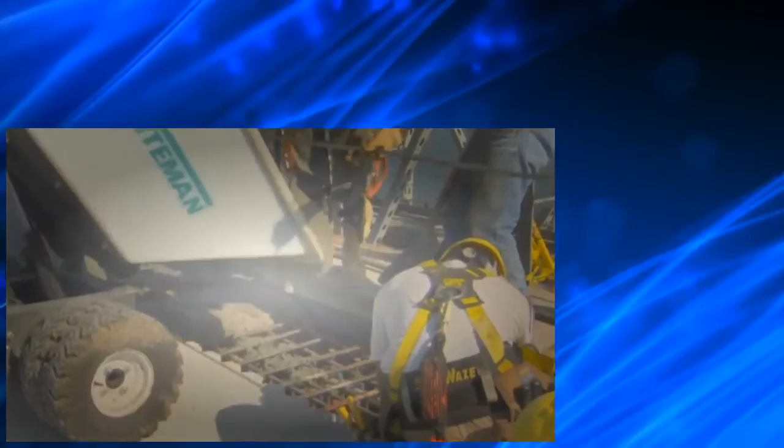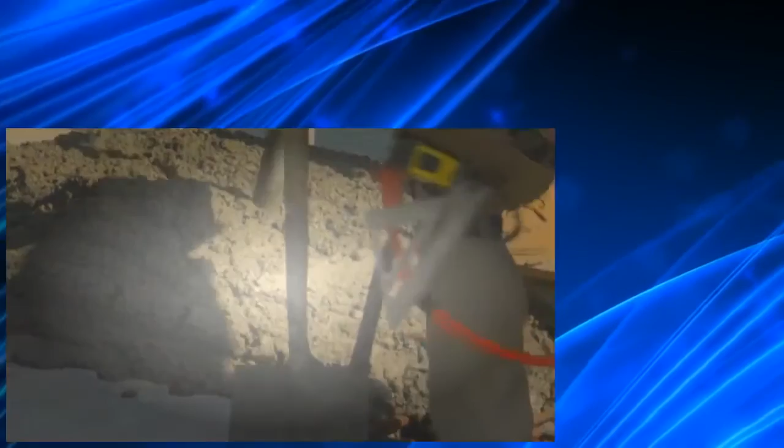You need to vibrate it. That gets your air out of the concrete and makes sure that you're getting it proper down underneath. You can get an air pocket like that, and that's no good. So you gotta put the vibrator to it. The mud's coming up stiff. I'm worried about this second bucket off this barge. If the first bucket is coming up real stiff, I guarantee you that second one's gonna come up a lot stiffer. Good, get out of the way.

Everett's a senior up here. I'll put my input in. Hopefully he'll say we'll go with it, go for it, and we'll work it. Or he'll make a judgment call on it saying it's just too bad. It gets too tight, too tough, and it won't flow around the rebar correctly. And we need it to get around that rebar correctly, or the state won't buy the bridge. There's a lot in here.

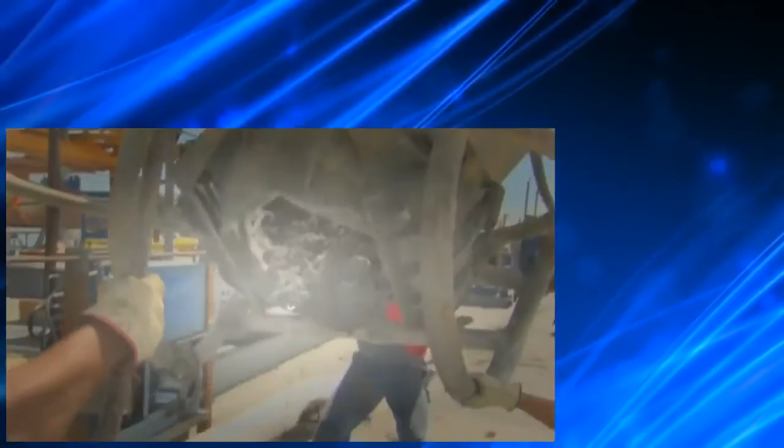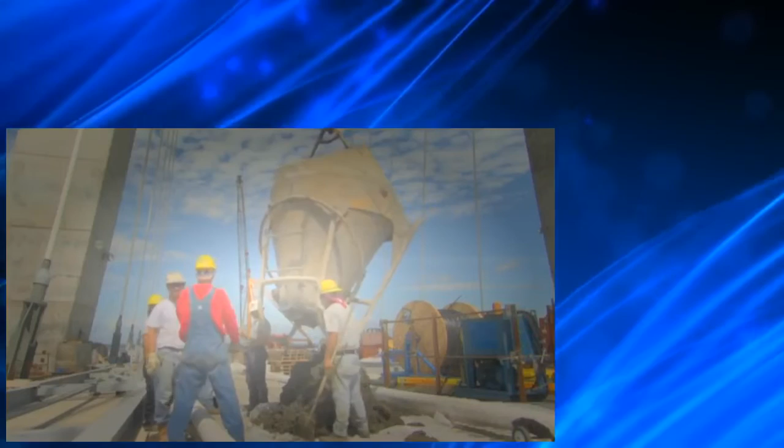Everett makes a call down to the barge where the rest of the concrete is waiting. He makes an agonizing decision. Dump the concrete. The truck gets a train, bad traffic, anything. All that takes away from the time you've got to get it in the hole. It's a race from start to finish. Time is of the essence. They need to dig a ton of rapidly hardening concrete out of the hopper, or else it will take a jackhammer to get it out. The concrete on the barge is rejected.

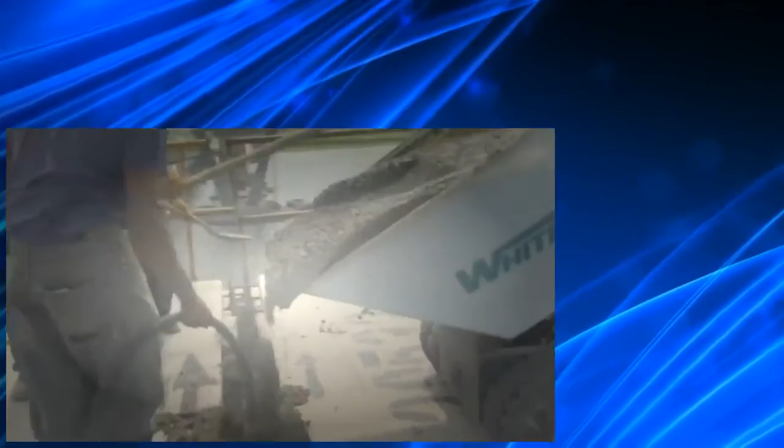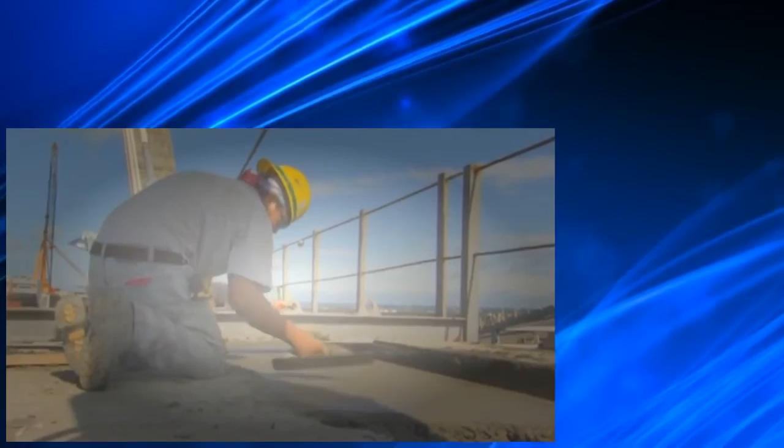With the first load mostly wasted, the guys still have the majority of the work ahead of them. But this is no time to worry about the setback. The second truckload has already arrived. It's being brought up in the hopper. There's an equal possibility that it will be stiff. It is stiff. But if he keeps rejecting loads, these guys could be here all night. So Everett decides to go for broke and deal with it. It's a risky call, and it's a real struggle to get the concrete to settle smoothly into the gaps. Their determination pays off, and by the end of the day, the road deck is finished. That's one section down this week, and 43 to go.

A long work week on the bridge is over. But a hard day's work wouldn't be complete without a beer at a local bar, Moe's Tavern. 200 feet up in the air, these guys are as tough as they come. Get a few beers in them, though, and they're just a bunch of softies.

I'll tell the world my wife is the most perfect wife in the whole world. And I would not be a bridge builder if it wasn't for her supporting me and taking care of me. She's perfect. My wife doesn't like it, but she's down here to be with me and support me. We've got a 3-year-old son, or he'll be 3 in another month or so. I can't go a day without seeing him. This is the reason why I'm here and work so hard.

Show him, pull it up. Show him. That's his wife right there. Can't take her with me, but I can take the brand with me.